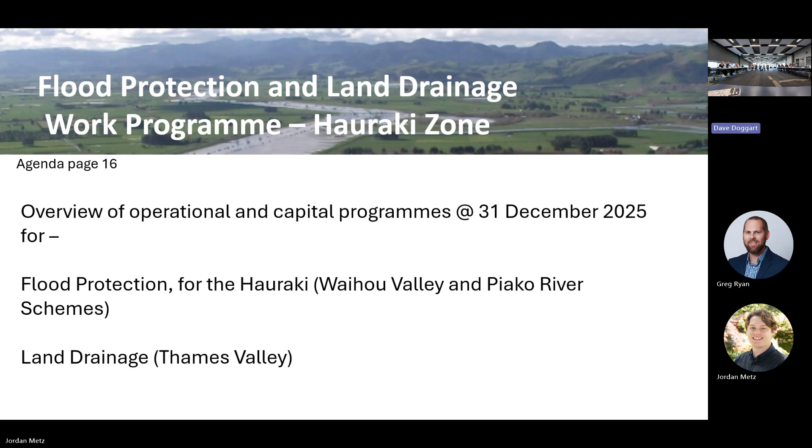Thank you, Greg. Thank you, Mr Chairman. When we talk about flood protection, we talk about operational, and that's what our first few slides are about - our operational program of works. The next slide discusses what types of activities we undertake in the operational space.

It's a busy slide, but ultimately we're saying we have the human stuff, our partnership and stakeholder relationships, our physical works around construction and removal in our rivers and streams, our condition inspections around our asset base, and our maintenance programs. Some of those are large pieces of work that cost a bit more, around pump station overhauls including pumps and electrical work. We also have the sediment trap annual program.

We'll be removing sediment from our sediment traps and structures to enable the material to dry for use in future years. We have our health and safety compliance, which may seem invisible but takes significant effort by staff to work through site by site and project by project. We have our Resource Management Act requirements - our consenting, whether a permitted activity or a physical consent with conditions - along with the paperwork and activity that goes with those, plus general maintenance: fencing, spraying, planting, and general support for our schemes.

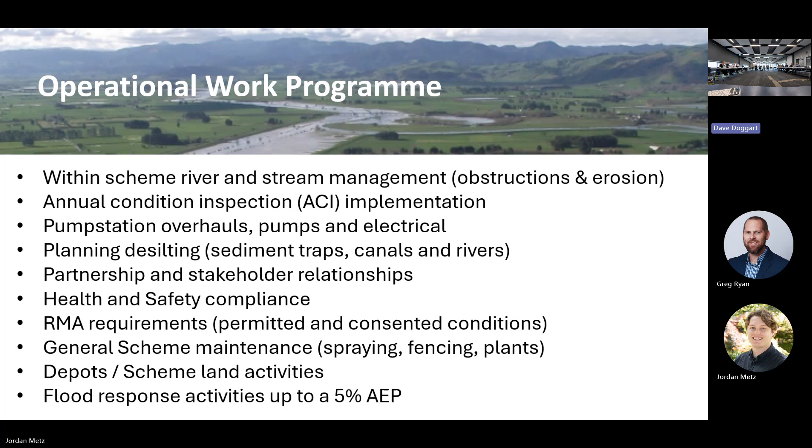So in our report on agenda page 17, we have this image, which is our operational program for the Piako River scheme. So we have both schemes, Piako River and the Waihou Valley. This shows us that we have 5 major categories of work.

We have oversight, we have information and advice - mainly human-based activities we're doing in those spaces. Then we have our river management, flood protection, and funding and interest, which comes down to the fact that we have a reserve that money goes in and out of. So we have a cost centre that works through those transactions. But as you can see, the larger part of the graph is under flood protection, so that's where all of those operational activities are taken.

The green bar shows us what our full year annual plan looks like to the end of June. At the moment, our budget is about 50% of the green graph, but we're slightly ahead of that in the blue, which is our actuals. There's some reasons for that, which I've discussed in the report. Ultimately, our on-the-ground activities are in line with our expected financial spend, but we've had a bit more expenditure related to depreciation and allocated costs. Some of that's timing and some of that's real change.

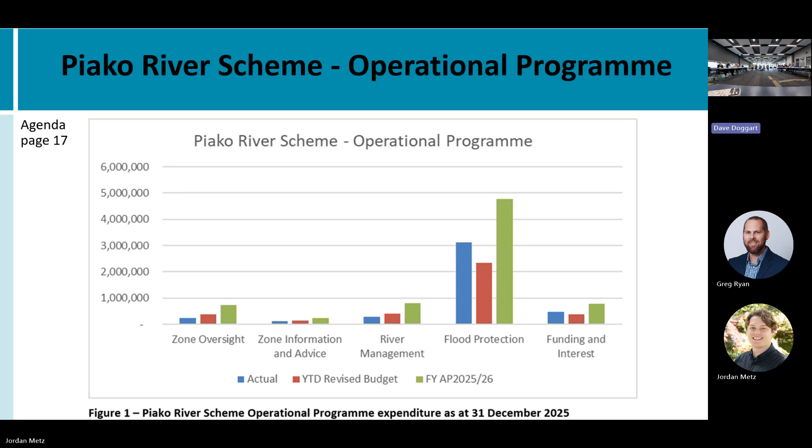With the electricity cost, if increased, would they come off a contract? Our electricity costs are impacted by how much our pumps operate. In particular, we have an agreement with the HDC to support the funding of our diesel powered pumps, so that electricity cost is offset by revenue, which we only see the cost here. In the description and the agenda it should show the amount offset by cash we received. In some instances it's like $6,000 offsetting like $180,000 of the cost. So there are some swings around roundabouts with our finances, purely because of the relationship we have with our territorial authorities.

Not unexpected, just is the difference.

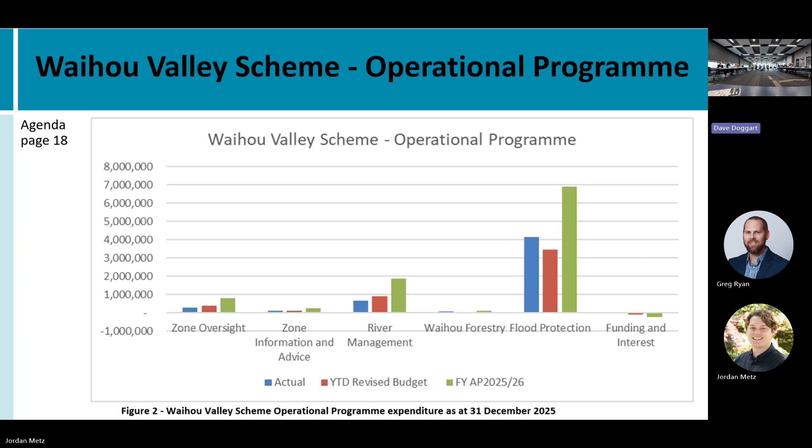Thank you. So this is the Waihou Valley scenario. You can see we have the same scenario happening in our flood protection activity, but the actuals to the blue to the red, it's less of an impact here. Same scenario applies: electricity increases, depreciation increases. Activities on the ground are moving along quickly and in a good space. We have a few photographs shortly of work that's being done. So if there's no questions on that, we might flip into some photos.

Oh, actually I think we've got land license next, but yes. One of the functions that we have available to us these days, having moved to a financial system a couple of years ago, is the ability for us to look at our work orders.

So now when we have a piece of work that comes through, the system creates a work order, identifies the location, the type of work, and estimated cost. That work order goes to the appropriate scheme unit lead to undertake the work, so that piece of work can be tracked through the system. Where is it at? Is it planned? Was it unplanned because it was part of a flood event, something like that? So this gives us a snapshot in time as to what these things look like.

For me, it's a good view to say which teams are under pressure, which teams are okay, how are we going? What we can see here is the bottom graph, the bright blue at the top and the rectangles shows work completed, and below that it talks about the individual teams that have got that workload. So the team on the Thames Valley Drainage on the very right, all of their work orders at that point in time had been completed. So that team may have other work to do that's not necessarily a works order, but they've completed all the other stuff that was needed.

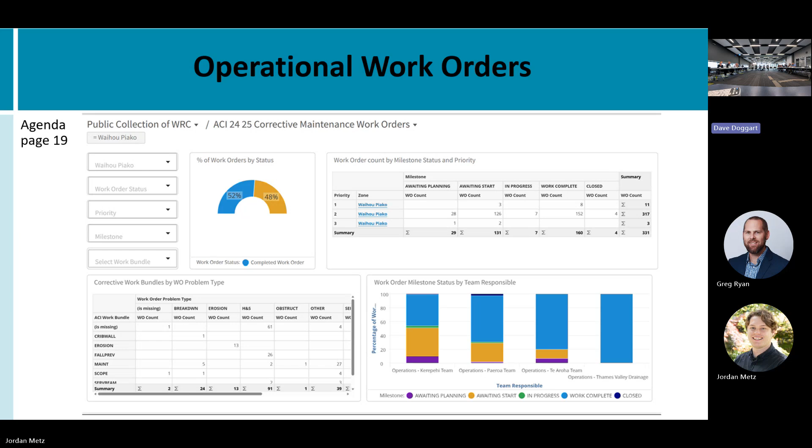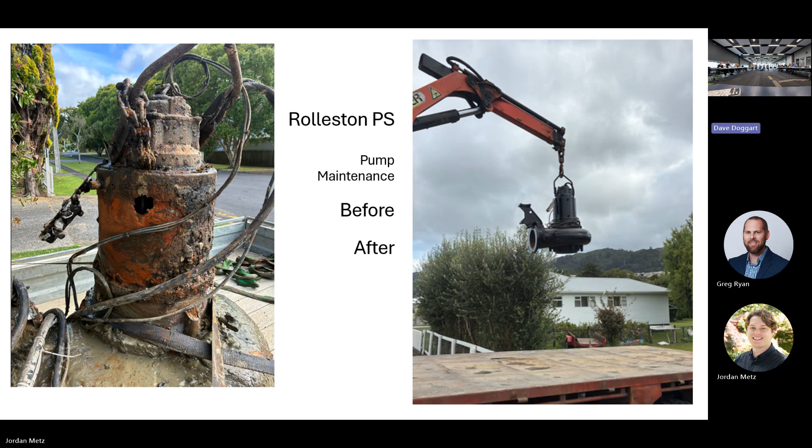Some of our images. This is the Rolleston pump station in the urban area of Thames. This is her coming out on the left and being put back in again a few days later, so cleaned up, tidied up, refurbished and back in the ground. Next slide, please.

Sarah's here, she's going to be talking about her papers shortly and can answer any specific questions about this. Part of our protection is that we recognise the scheme land program as cost and in revenue.

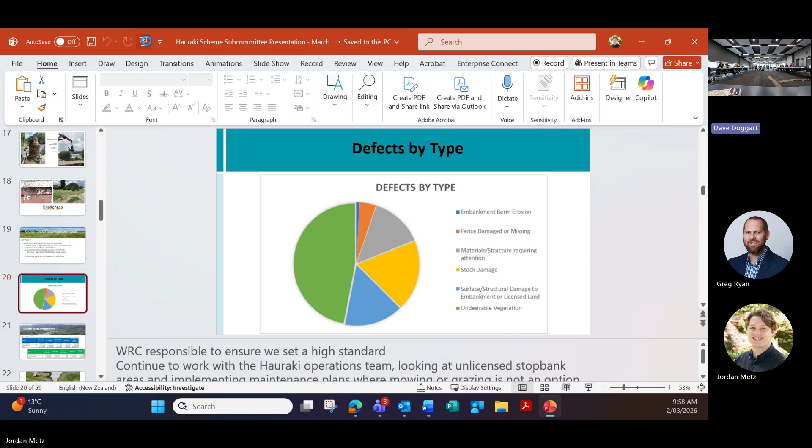Here's an example of the types of defects we've got in total at the moment. As you can see, almost 50% of it is undesirable vegetation. We're working our way through what that looks like. Stock damage is one of the other areas.

When we're talking about totals of defects, what's the overall total? I think it's down to about 120. There's a table in the agenda with those numbers.

The contractor that upgraded it left clumps of dirt everywhere, so when the contractor came along to mow it, he didn't come back. Bales fell into the board drain so they can't get a digger in. Bales out, but there are just parts of it that are not good. Other parts have done really, really well.

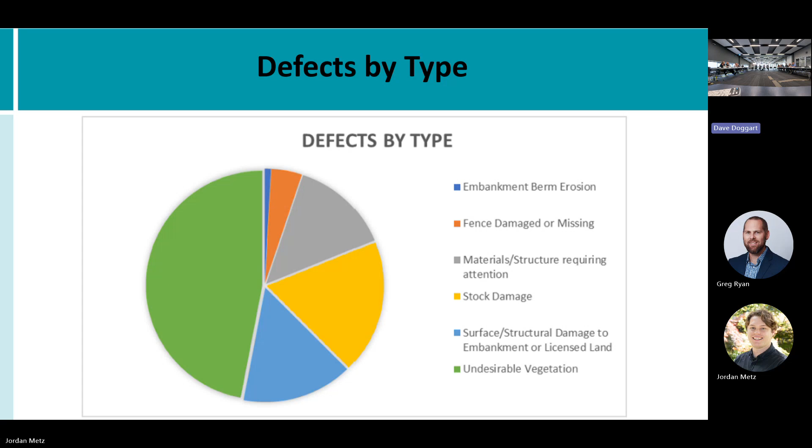Thank you, we'll be discussing it in the next presentation. Go on to the next slide. So that was our operating program, now we can move to the capital program.

And what we have is a number of significant projects per zone, per scheme. A lot of those I've got photos of next to talk about the actual work. So what we can be certain of is that we have this well managed as a program.

Any questions on the finances before we move to the slides? Other slides? Oh, thank you, Jordan.

This is the Cocks floodgate on the Waihou scheme, through Left Bank, just in the area you were talking about, Roger. This is the image now from a drone photograph.

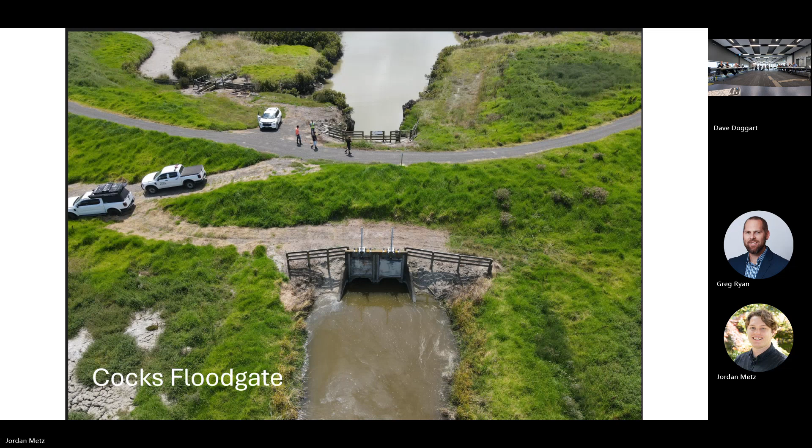That's a project that's underway at the moment - conceptual, of course, it's yet to change on the ground. We're in the process of investigations, just about complete. We've got a design to kick off and then construction for this summer.

So we'll be working with the Hauraki Rail Trail on this, because this affects the trail that's on that side. But this has been a project and program until we roll out.

So is that a wall gate with a bridge, or is it actually a culvert? The intent is that we're looking through design to make that decision. The old gate - oh, the old gate is a culvert, box culvert. It was the first one put in the scheme.

We're looking at design, possibly being a sheet pile wall gate. We're not certain yet, but there are a lot of benefits cost-wise to go that way. Definitely. Okay, next slide please.

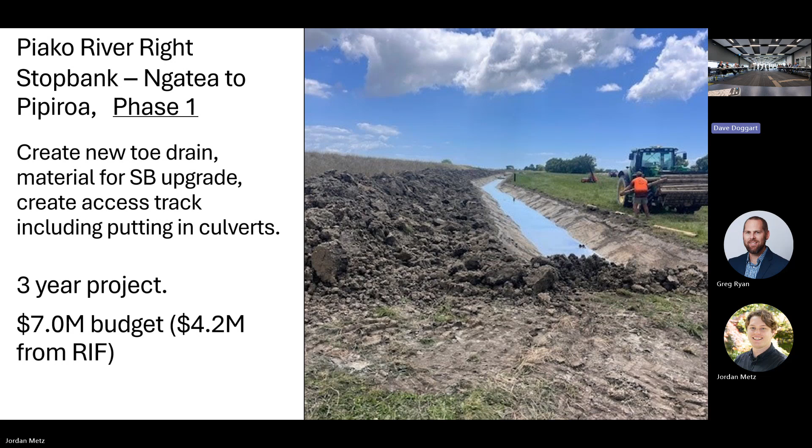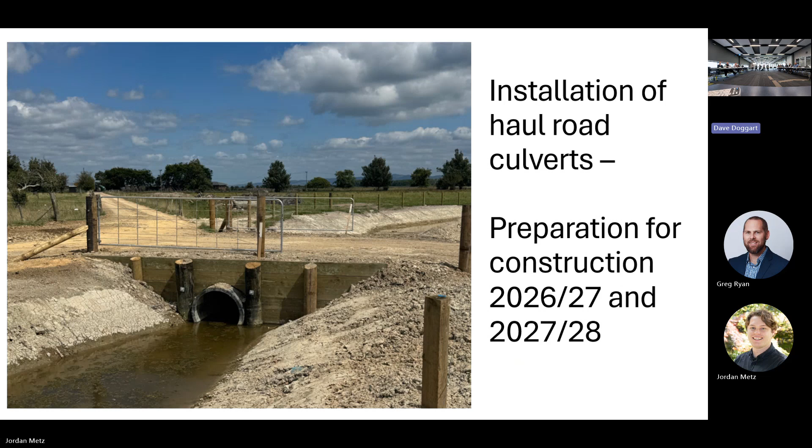Next two slides show you what we're doing around the culverts and the preparation for the haul road upgrade, the stopbank south move, and upgrading the other bits we're not moving over the next 2 summers. That's a standard one that's completed already. The next one is a slightly larger culvert, not yet completed, at Johnson's pump station, because this will be a turning point, so we made this one a bit wider.

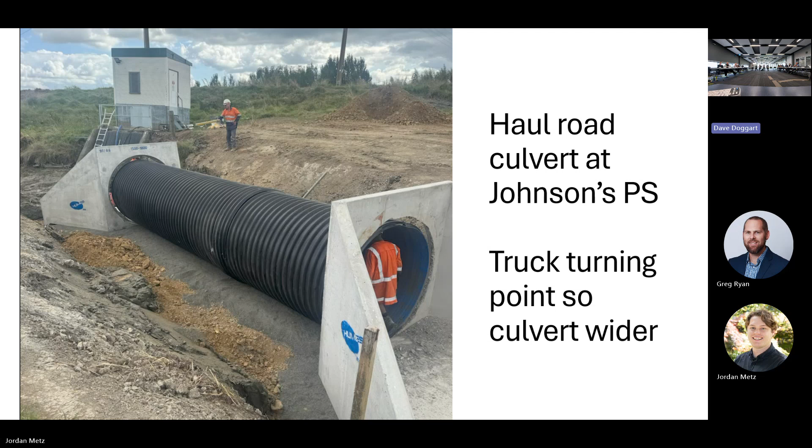A lot of this information is scoped and planned well before we get to the on-ground works. This piece of work, the current contractor will finish this month for this year, and then we'll go into a new round of procurement for the construction works for the next 2 years. Of the $7 million, 1.7 to 1.8 of that will have been spent this year, so it's still a significant amount for the next 2 years.

Moving on to other forms of capital work that we do. This is floodgate outlets, driving poles, gum poles in particular, to support the shape and behaviour of those outlets. We've also got willow tree removal work going on to support where they've been falling into the streams that feed the outlets. It's kind of BAU everyday work for council.

What we have is pump station space frames being replaced, which supports the integrity of the pump station but also safety from a staff perspective. And we've also got the Ngarua pump motor replacement, shown on the right.

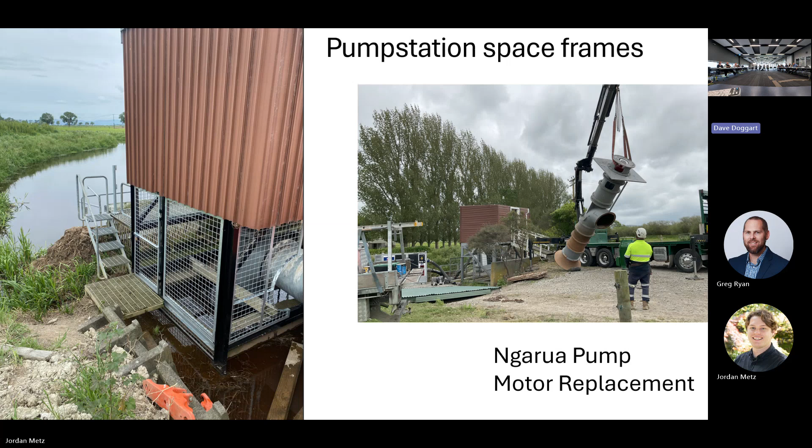Next slide. Kapukapu Dam inlet on the screen. This is to address the fact that we get a significant amount of debris coming down that catchment during flood events. It's a huge risk to us if that gets blocked—it's a stream, we need that to continue to work. So we've altered what that screen looks like.

What's the gap on those, the width of the gap? Very good question, off the top of my head I'd have to find out for you. Is there a hose in there? No, the hose is just cleaning it out at that point in time. What I can tell you is behind the screen is a plug with a restrictor plate on it, so it restricts the flow down to 780 mils with an outlet of 800. So anything that does go in will get out.

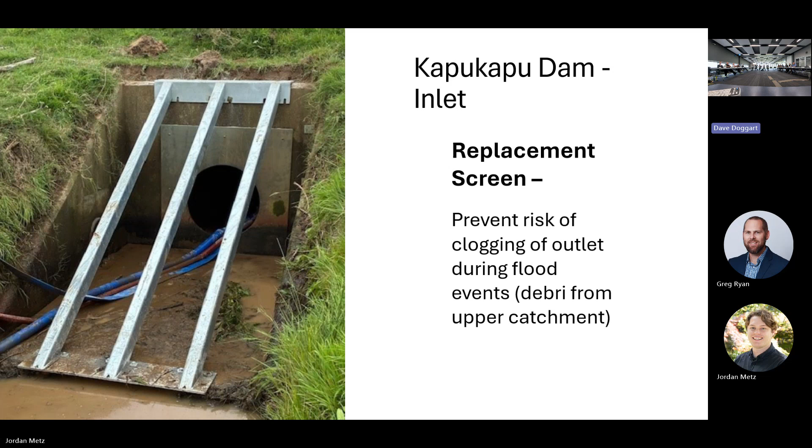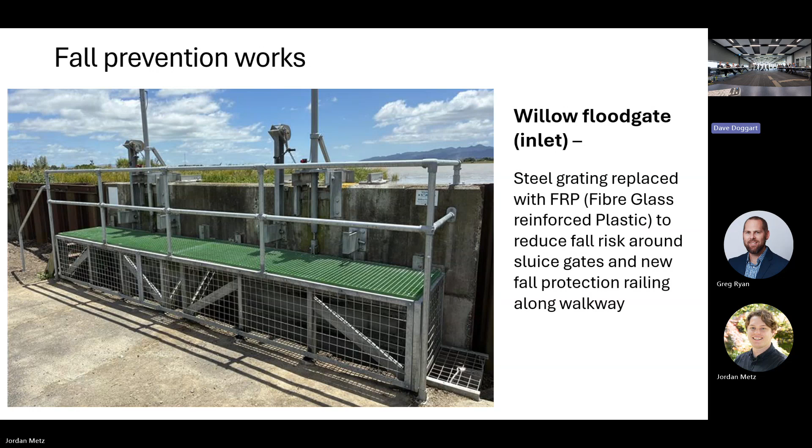Fall prevention works is a significant part of the information we've been gathering through our annual condition inspections. Here's an example of work done around reducing the likelihood of falls and injury around sluice gates and floodgate sides, railing, walkways, etc. So that's one example—the Willow floodgate, if you know where that one is. Next slide, please.

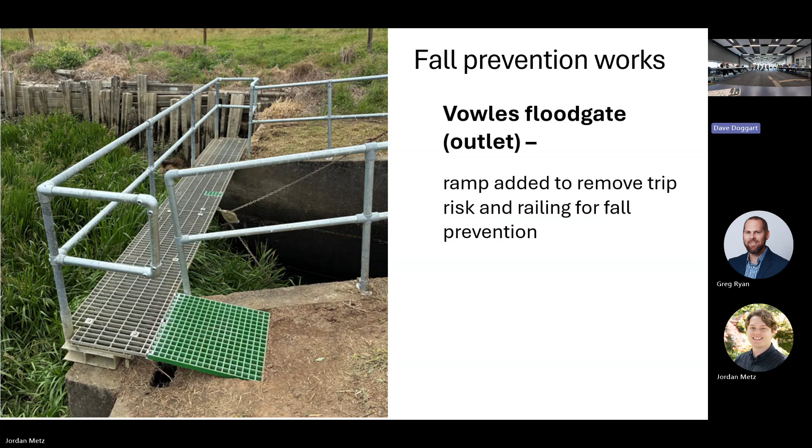Next slide, please—I think that's getting close to the end. So H drain, our inlet work: we've got some rock revetment going on there, supporting the flood gate. It's kind of BAU stuff.

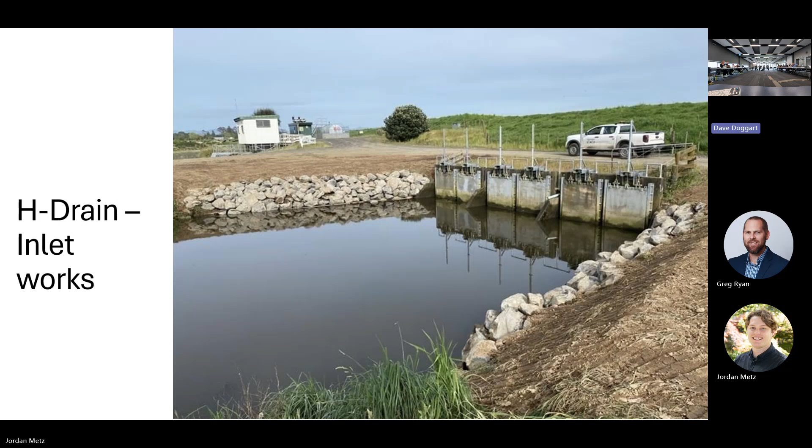So that's the end of kind of what is our standard BAU year, six months for our programs at the moment.

What I wanted to add on, which isn't in your agendas because the information wasn't really available at the time it was put together, is a quick overview of what happened in the January severe weather event.

We've got the Ohinemuri at Queens Head registering more than a 100-year level event. Hence the river itself has been cleaned out, a lot of berm and river shape has changed, and a lot of that material has moved.

I'll show you a couple of slides shortly that show some of it's gone, but we don't know all of it's gone. Ultimately, we have a challenge now to understand what has changed in that river.

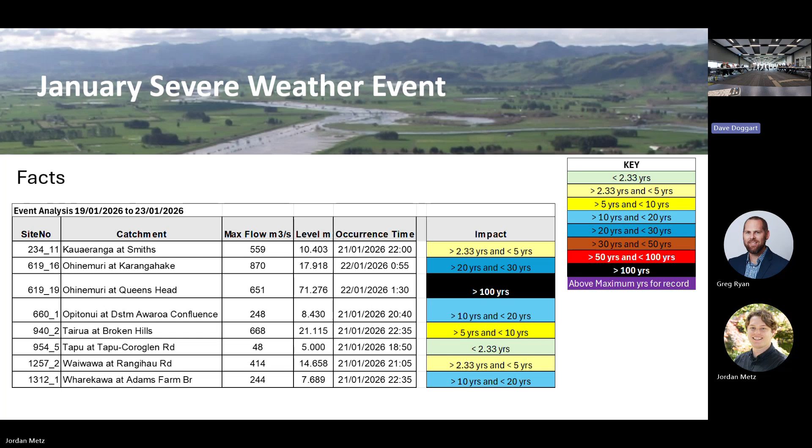Next slide please. You'll be aware of the flood gates in Paeroa that support State Highway 26. This was later on after the major weather had passed. You can see the wee white dot here - that's where Cyclone Gabrielle's water hit.

This actually was above that. This is a few hours down the track after the event, so the water's starting to recede. So this event was more significant than Cyclone Gabrielle for this catchment. What it's done is left a whole lot of debris on that fence line that you'll see if you're driving through Paeroa.

We have a plan because that land where the goalposts are, the soccer field, the Hauraki district don't want to lease it anymore. So the plan to manage that - the fence line will be removed and we're putting bollards along there to stop people getting in, but it also saves us from catching debris in a future event.

One thing I brought up in council a couple of times about what happened in that weather event - I was highly disappointed that Higgins didn't turn up to support our staff to shut the road. I've clearly stated numerous times in council, and there's two councillors here, that there needs to be something done to shut down State Highway 26 at Porotahuna Road.

I hope you will support that happening, that the staff in Paeroa will make it clear that if they're to operate that bridge, there cannot be trucks and other things coming down expecting them to open the gate again to get through. That's not your job - your job is to shut the gates and keep the community safe.

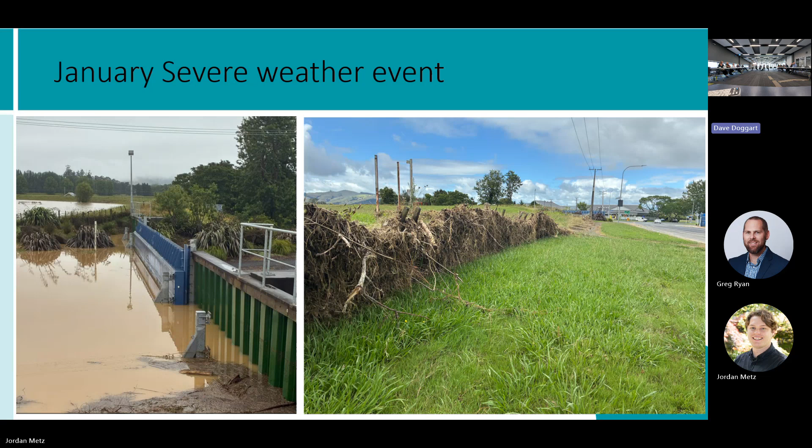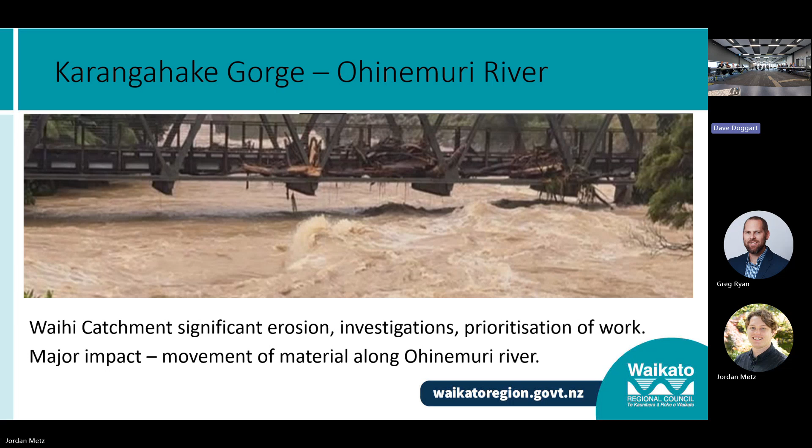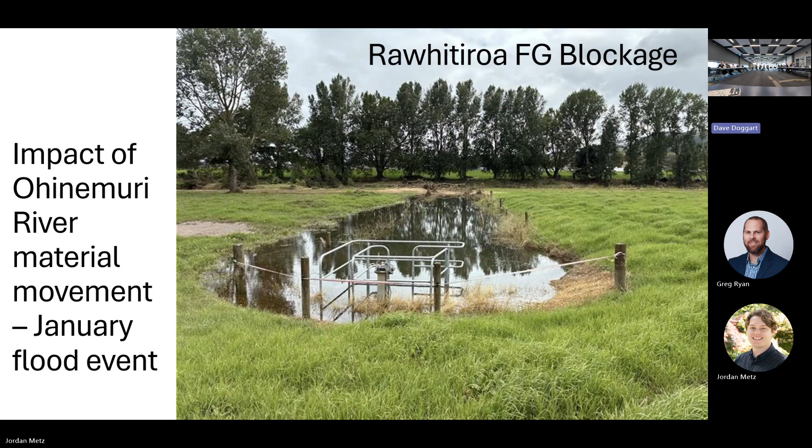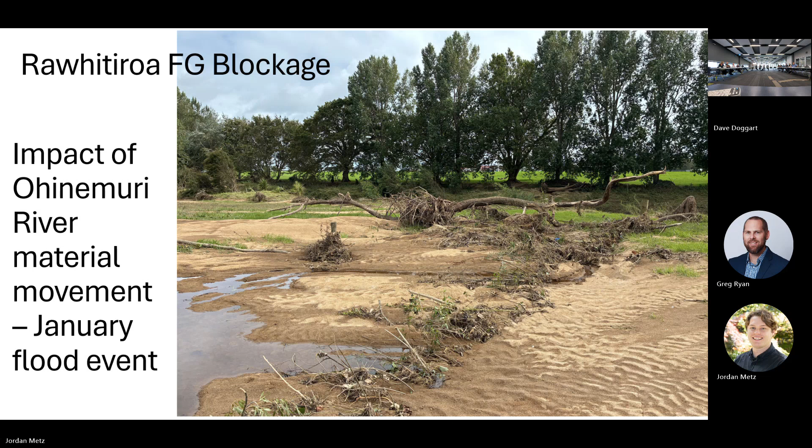So it's one example of costs that we have incurred. That completes what I have from a flood protection operational and capital discussion today. Is there anything anyone would like to discuss before we move on? If no one's got anything, just one other thing.

After the events, a week after, myself and Greg and Karen went on that. I seriously think we need to do something about the height of those poplars on the Waihou River. Even if we just clip the top out of them, and go back another couple of years and clip another bit out, we don't have a whole lot of material we have to move. If we could start clipping it, because some of them are getting really big, and we don't want to get to the point where they're monsters and then we've got to pull the whole tree out.

Of actually doing something about... sorry, I suppose I shouldn't. What is going to be your management of dealing with this in the near future? It's a good question, because there's some serious issues. We do not want to see big poplars.

Thank you, I will take that one and give it to the government. We've got an annual plan at the moment, well you're not going to get in that, but a long-term plan, there must be something better. Got to do something about the management of those in the near future. Yeah, I'll have a discussion about what the risk is. Thank you, Karen.

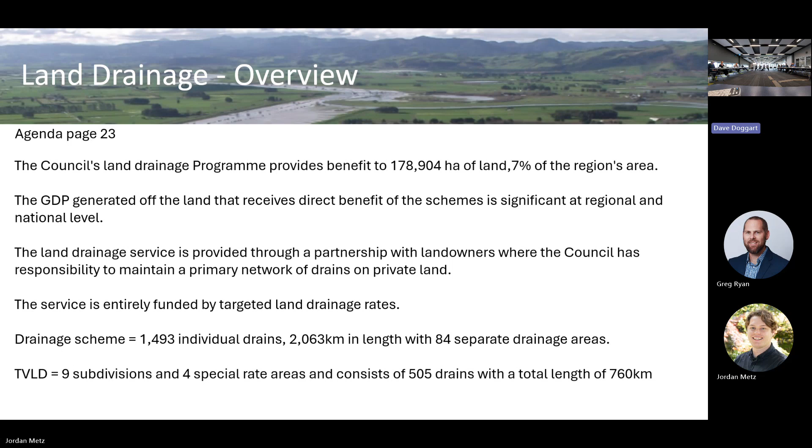Okay, so a quick financial overview. Like most of the other areas, we're running at about 40% of the spend at the end of the season, and that reflects the work program at that time. We'd expect it to be about there, sometimes up, sometimes down, depending on whether there's storm damage to deal with.

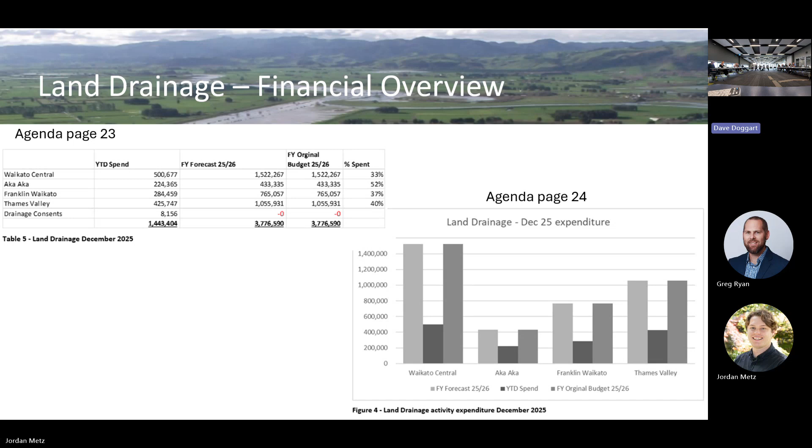Okay, so land drainage finances. Looking here, you've got Aka Aka that's up a bit in terms of the spend itself, and that reflects some issues we need to deal with in finances. The spend is up because we've got some labour costs that need to be reduced, and some charges in there should be adjusted.

So by the 30th of June for the financial year, we'll have the corrected financials available. But in general, we're sitting about where we think we should be, ready for our autumn programs, that's spraying and machine cleaning.

Just kind of financials. Where are they going to be recoded to?

Well, some of them are. We just had a wrong rate for labour, so that would be corrected and reversed out. Some of the labour was in the wrong place, which is the bigger issue, and would need to go back out to flood protection.

Yeah, because you can't do that. I can't do that until I talk to the scheme manager who says this is where it should come from. So it's got to be a collaborative approach as to where that work's done. It's not just taken out and put where I think it is, it's got to be reviewed with the scheme.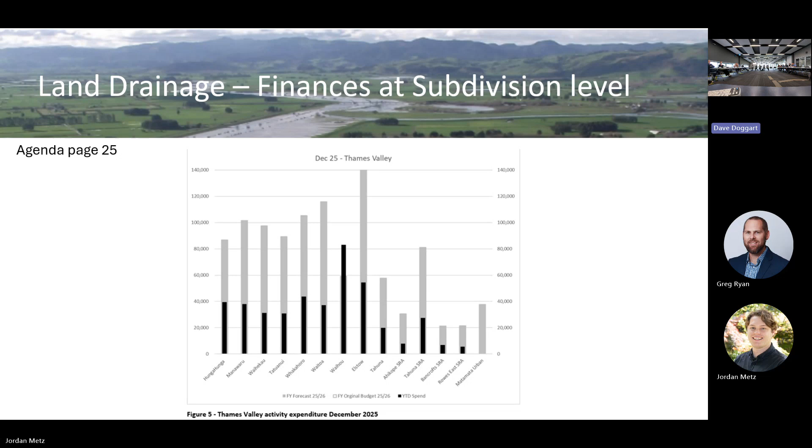Okay, so just in terms of the operational metrics, we're sitting at about 40% of the spend. We're delivering the services using contractors and our staff across there. So we're doing 4 subs and our contractors are doing 5 subs.

We had a new contractor on last year. They're picking up much better this year in terms of that, so that's looking quite good. We're seeing a little bit of cost come down as well as they get more familiar with the work. We've sprayed about 135 kilometres and the contractors have done 301.

In December, machine cleaning, we've done about 4% of the area. As you know, we don't machine clean everything, only where machine cleaning is required. We've achieved our level of service, which is getting stormwater off pasture within 3 days, up to the 10-year storm.

We saw from Karen that in the Thames Valley diversion channel project they had done 100% of their works orders for the season, which means they've been very successful. So the 25 season has been very successful with fencing, planting, and shaping of drains.

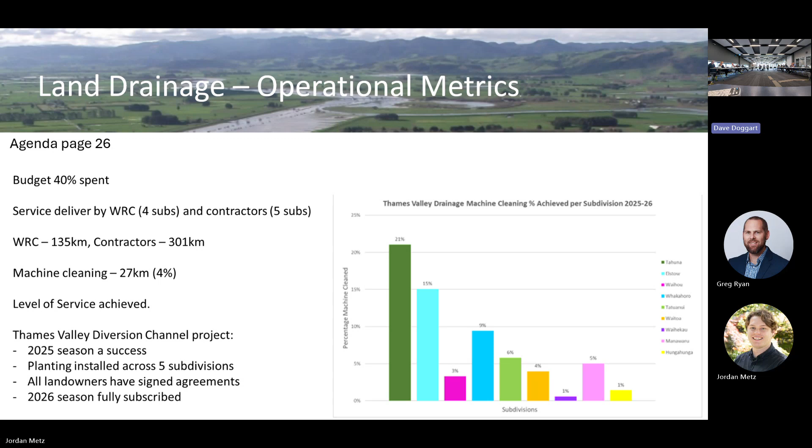Okay, so next slide, thanks. We've just gone into some pictures really around some of the business as usual work for us - so really just some drains, showing a bit of drain work in terms of discussions with landowners. We can't put everything up there, but this was a drain the guys had recently done through there and done some cleaning up.

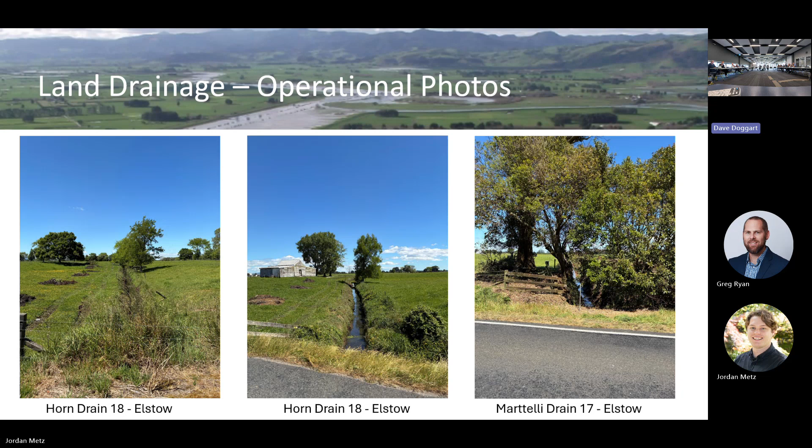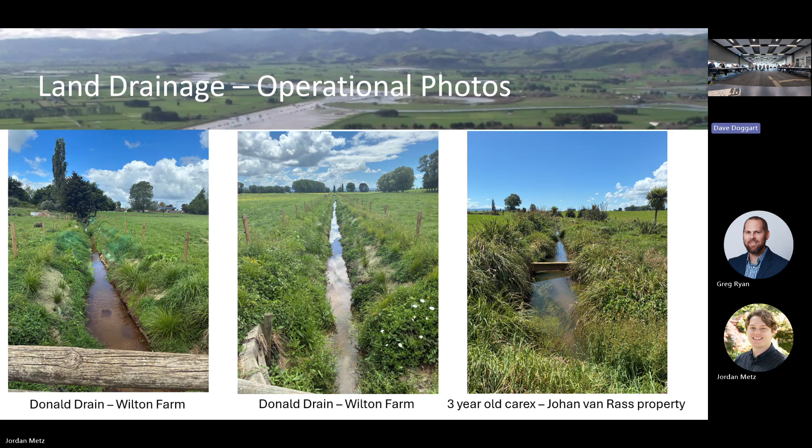Next slide, thanks Julie - everybody's used to seeing works like that. So you've got these drains here - this is where we did some of the planting around there for the project. I've been out with some landowners interested in this, so there's less need for drain cleaning, and you've got some area under there so there's less weed growing. So it's quite useful, and again in the future it's something that could be extended. I'm across that with the team, working well and doing well out there.

So this was a little bit about being prepared for the anniversary event in January, where the teams did some clearing of the North Road pump just to let water come through it. It's just an example of the teams here knowing there's an event coming through. We didn't get hit with that one, but we were prepared because it stayed mostly on the eastern side of the county - you can drive across the river and see it on this side.

It was the same in Waikato through those things, where they get prepared for the event coming through, based on understanding the time of concentration on each of the catchments of where it's coming to. Because I always say to the guys, are we prepared, what should we be worried about? And they said, actually, we're okay - the systems are in, we're not expecting anything for 3 days. Here, we're not expecting anything for 3 to 6 hours. There's a difference in the way people look at it.

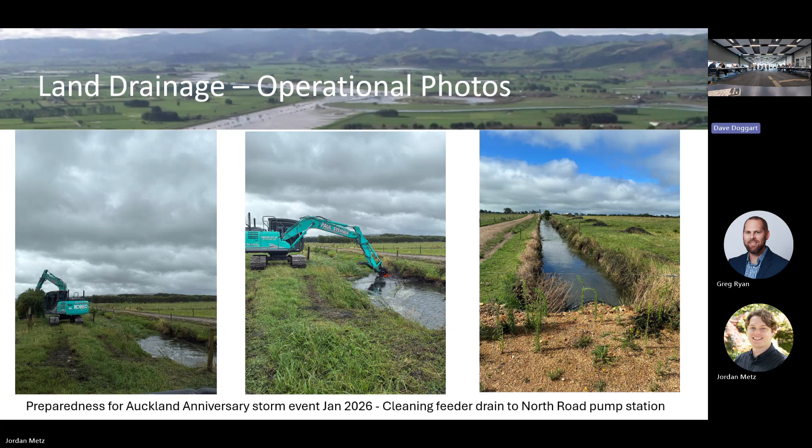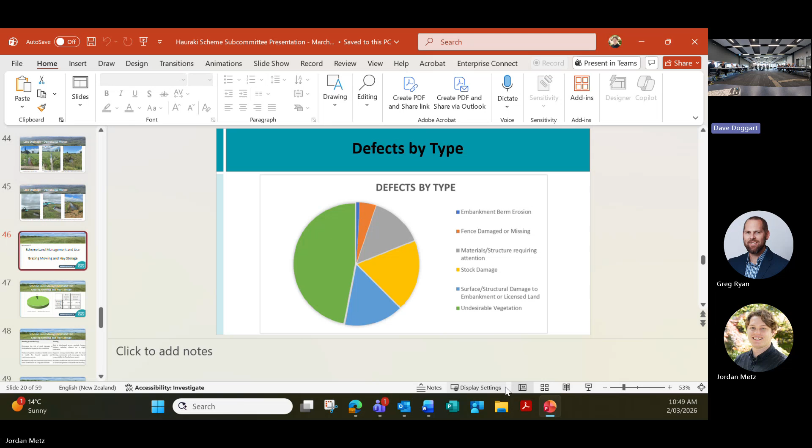That's it - happy to discuss further if you'd like. Any questions?

The one about drain plants. With the issues we've got down Hauraki Plains with tuna kills and that with hot water, warm water - are we going to try next time we go for a round of funding, work with Hauraki to do some more planting around some of our major floodgates, for tuna, because of the botulism and those other issues we had down there in the last 3 or 4 years. Is that something we're looking at in the future?

We don't currently have a plan to do that, but there's no - well, we did in the Green Corridor, we were planning on doing some of that, but it sort of died off. That's why I'm just asking the question.

It's always an opportunity. Next time we go for deluge funding on tranche 3, it's most probably something to work with Hauraki on, to have a long-term benefit for drainage outlets down the Hauraki Plains. I think it's most probably a good idea. You agree?

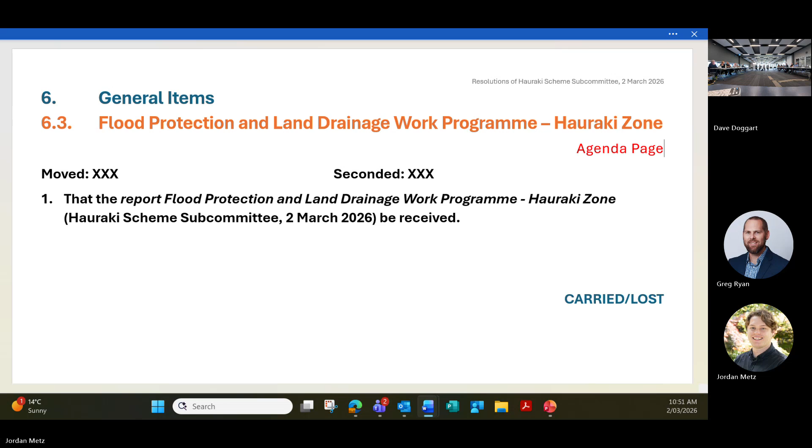Is there anything in this about doing another tranche 3? There is tranche 3 at the moment. It has had to be closed quite substantially. We don't have the drainage - I don't think we have drainage budget work in that particular one.

Look, maybe we don't necessarily have to fix funding, because the question you're asking is about how we do our capital projects as well. We have to consider how we do them, and do exactly what we did with the asset rationalisation project. It was great that we could get funding for it, obviously the costs, but there's nothing stopping us from doing other projects differently.

Well, there are other organisations we can go to as well - MPI and others, lotteries, stuff. It's not a huge cost either. No, but it's something we should be working together on, since we've got you two in the room today. You can go back and say we're talking about it, so start to get together and have a chat. Thank you.

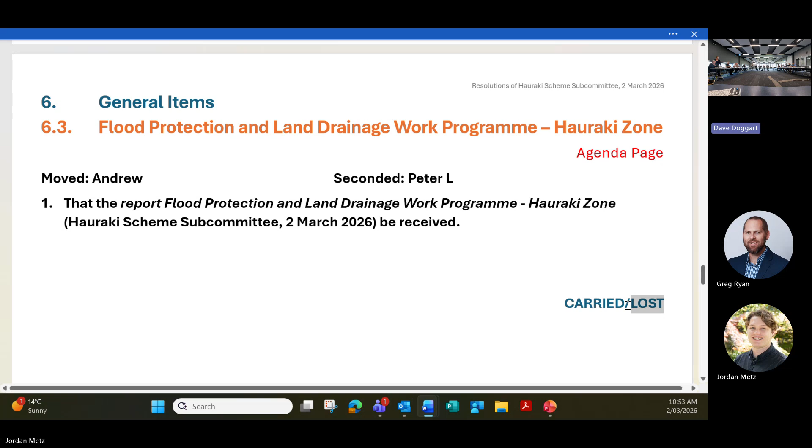There's already been a bit of discussion around this one, so it's good. There were just some questions raised at the last meeting around mowing on the foreshore, so thought it would be a good opportunity to talk about that and share what we do, and also have a discussion about the need for some kind of storage, or the mulch, the hay.

Just over 95% of scheme land in the Hauraki Plains is grazed, and just under 5% is now on a cut and carry basis. These figures on the right show the gross income from each of those. Bear in mind, those numbers for mowing and baling don't take into account the cartage and contractor fees - once those are accounted for, they're roughly on a par with how much income there is from those.

Next slide, please. So there are benefits for both methods. With grazing, the risk is shared across multiple licensees.

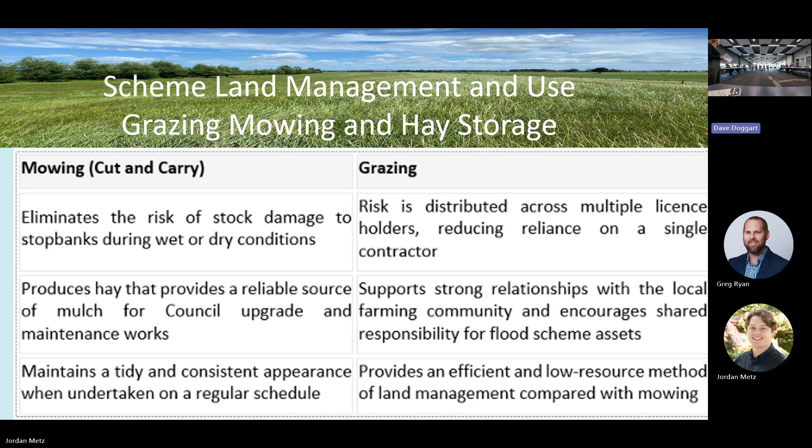Next slide please. This is just an example of what we were looking at, and there was an option for a concrete floor. Just thought I'd throw everything in there for people to review. But yeah, around about 100,000, that's with contingency in there as well, for an 18 metre by 10 metre shed, just to store whatever we have left over. There's going to be a stream of upgrades into the future on stopbanks.

We're not likely to use all of the hay that we currently produce, so we just wanted an option that we can maintain that in a good usable order, whether for ourselves or to sell to private landowners. Yeah, that's pretty much all for that. So were there any questions?

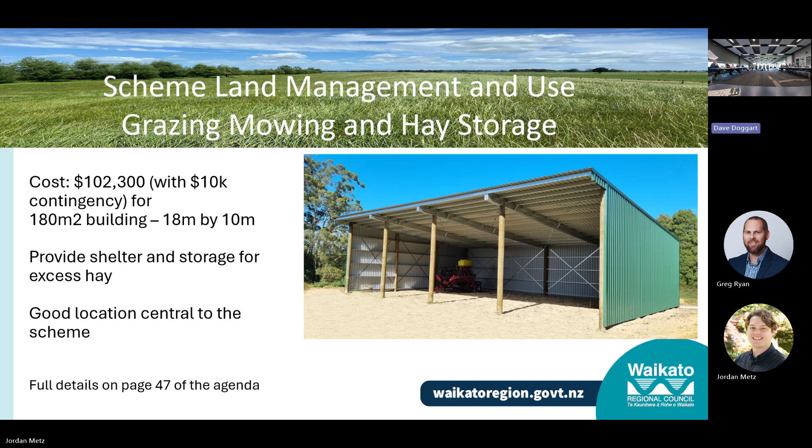And once again, I know we discussed about a working group to talk about those, so happy to also do that.

Through you, Robin, it's a bit of an awkward one because the grazing gives you grief in the winter time, but when you cut and carry you've got to do it 2 or 3 times. How do you get on when it's wet? When you get a huge winter growth, late winter growth, cut and carry early September, you've got long grass. It's too hard to do anything with it that time of year.

Yeah, it just comes down to having to manage it. Keep in communication with the contractor, check if it's dry enough. Actually go out and walk over the stopbank and think, is it dry enough to mow or not? We're going to have to wait.

So we're going to put in place a bit of an agreement with the contractor, just to allow for all of those factors, have a required number, make sure they're not out there when it's too wet, and just manage that.

So why don't you just mulch it and leave it there? But then they want to cut and carry it so they can use it, not all of it. Just those difficult bits, just mow it with a mulching mower. Oh yeah, well that's it, it's a good organic mix. Yeah, I mean it's a cost saving.

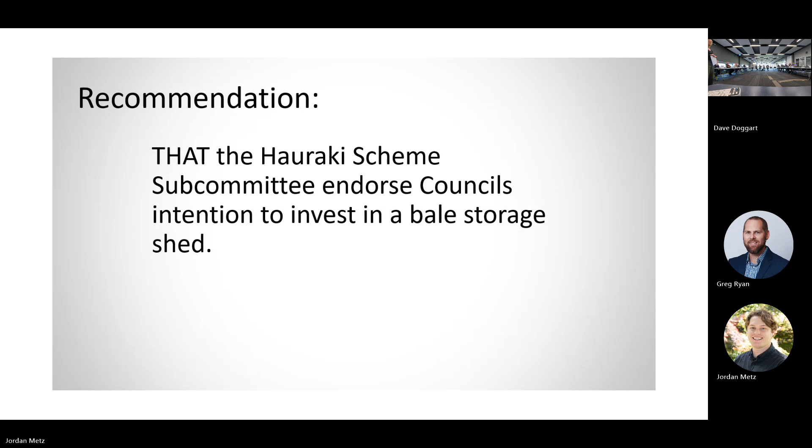So back when the scheme was being established, this portion of land that we're referring to wasn't purchased for whatever reason, not sure, but it sits just wedged in between the peat dome and what's locally known as the ABCD Flax Block. It's in quite a crucial part of the scheme where the Piako River cuts inland through the wetland.

It seems to be a bit of a pinch point where this is the first area to flood in a flood event. You've also got the Maukoro line stopbank that runs along here, so that essentially cuts it off from the rest of the farm, and there have already been preliminary discussions with the landowner, and they are willing to sell that bit of land at this time.

So it's just over 18 hectares, and there's a DOC stopbank that runs along the top here, and there's also some other low-lying stop banks that aren't council owned, that were possibly put in by a farmer to protect that bit of land. So that's what we're looking at. Next slide, please.

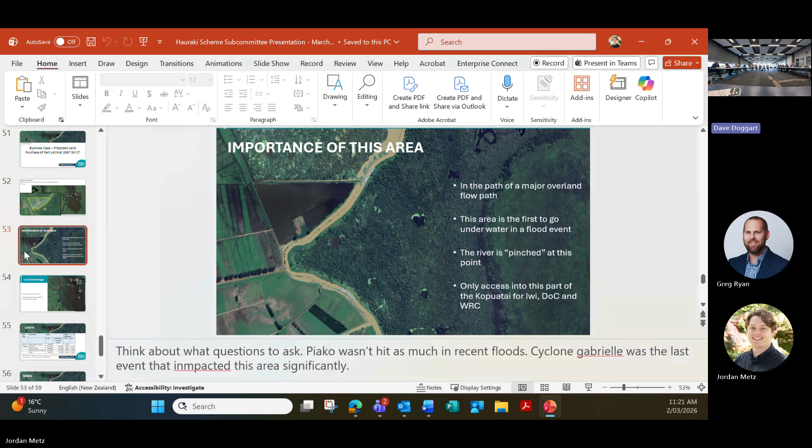That's a good point - what discussion has council had with DOC? Because that's a pinch point. I'm on the other side of this. What I see is that in my lifetime, we've gone from grazing these blocks, where stock actually opened up the channels and the vegetation underneath, allowing water to move in and out. Now we have this vegetated barrier that's most probably close to 1,200 high, and the water comes down like a blocked drain.

It doesn't want to flow in because there's no open channels. So unless we have a discussion with DOC about being able to open certain areas on the other side of the river to allow that water to flow through, it just channels itself straight to that point right at the end of Maukoro Road, and then it won't go anywhere else.

And the other question is, I know after [20]17 there was - oh yes, we've opened up a couple of channels into the flax block - are they still being maintained?

The Constellation drains you're talking about? No, not the Constellation drains. Kenny was working on actually having a bulldozer go in and cut some slots into the flax block. The flax block used to be grazed by livestock.

To be honest, with the stock being in there and the grazing license revenue we could get - I know this is going to be a no-no because no one wants livestock on DOC land - but the level of service from having stock open that up, allowing the water to breathe in and out like a set of lungs, and the revenue from grazing using a system like Halter, where stock were there only a limited time, would alleviate quite a lot of the pinch points.

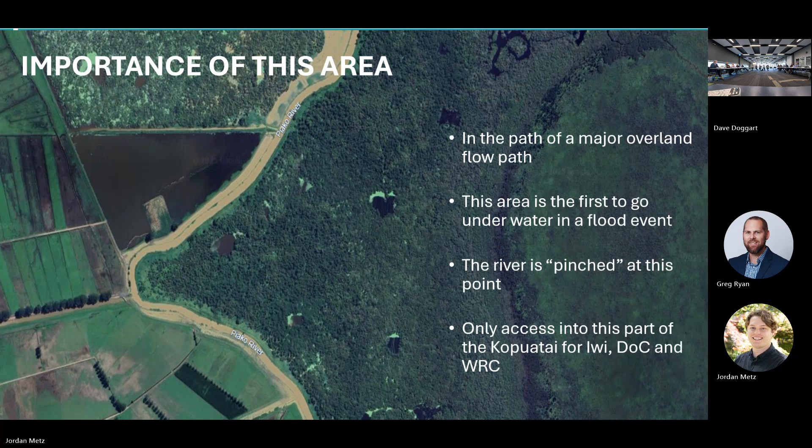Onto the next slide. I'll sit down and let Grant do the talking - Grant is our subject matter expert. He's got a bit of a video explanation on the flow path and what happens in that particular spot.

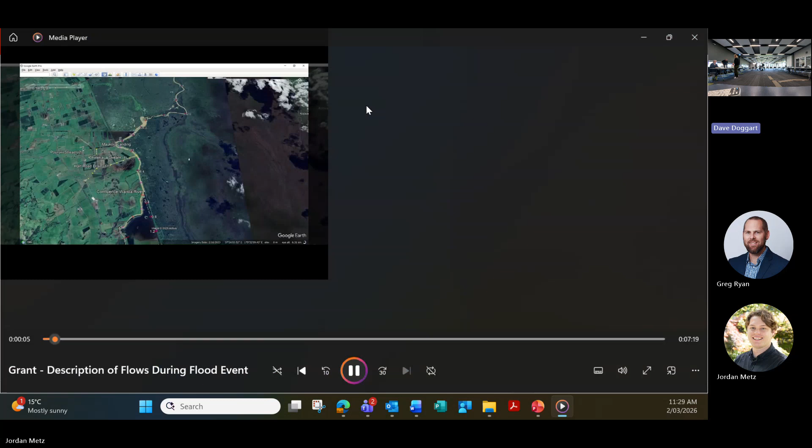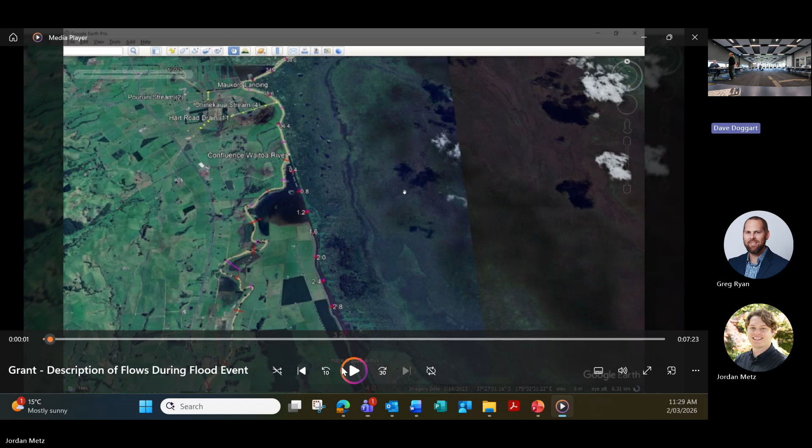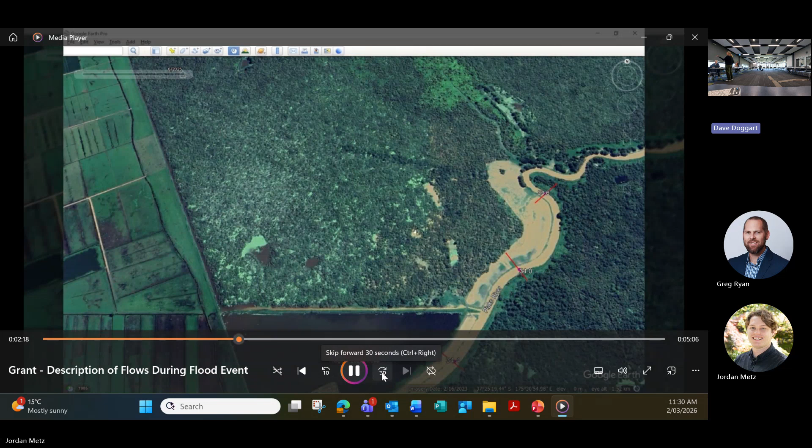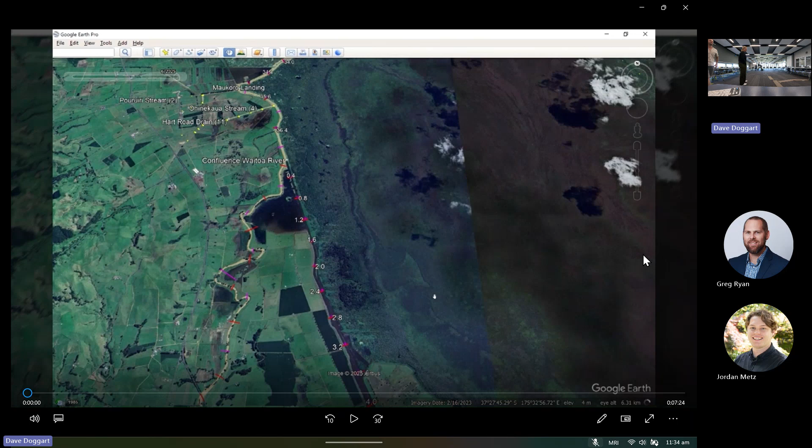Is it just me or is it freezing? It's cold, eh? It's cold, man. I don't even get cold, but it's cold here. I'm thinking summer's finished. That's right, you can tap that button surely. That's when I forgot what jersey I put on, but it's summer here.